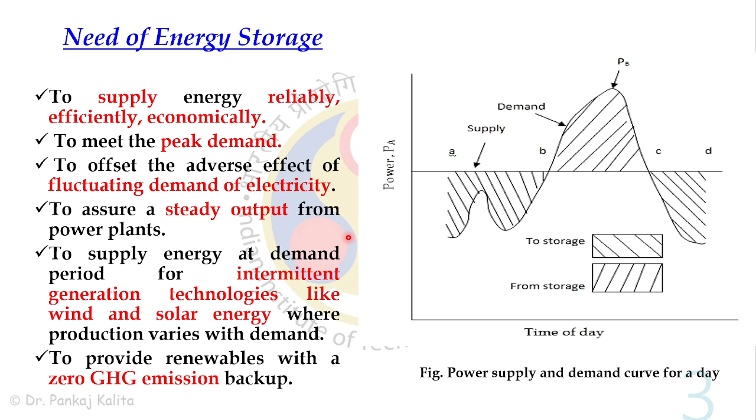To bridge the gap between supply and demand, energy storage systems come into picture. What does an energy storage system do? Basically it stores the surplus amount of energy generated during the day, or say during summer season, and then supplies it when your energy generation is low, say at night time or in winter season. So this energy storage equipment provides a very steady, reliable output to meet our demand. That is the whole idea about the energy storage system.

For that we need an energy storage system - it could be thermal energy, electrochemical energy, pumped hydro, which is very common, compressed air energy storage, energy storage by flywheel which is a mechanical form, magnetic energy storage, chemical energy storage, or hydrogen storage. Depending on the temperature range of your application, how much energy density you want, how much cost you want to go for, and how efficient your system is, we decide which energy storage system to go for.

So here we'll mainly talk about thermal energy storage and thermochemical energy storage.

So have I already explained what is the need, how does it work? Basically, when a surplus amount is there, storage is there, and when there is deficiency, then your supply is there from those storage medium.

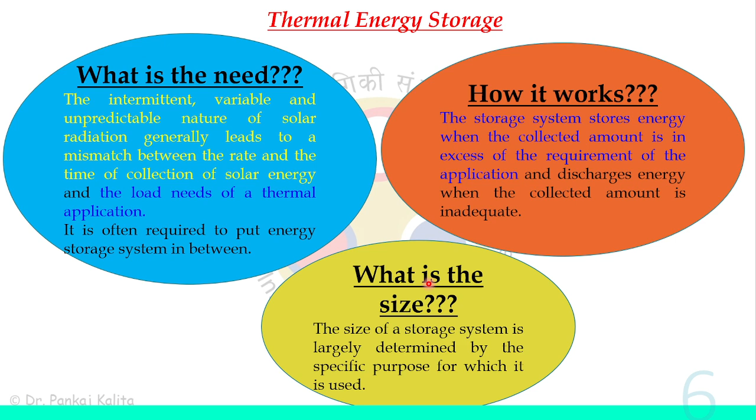What is the size of this thermal energy storage medium? That depends totally upon what purpose you are going for. So, depending on whether your demand and supply is consistently happening, and you have to store it for a very small interval of time, then you need a very small storage, a buffer storage. For a day you have a diurnal system, and for annual storage, you need a very large long term storage system.

So you can see this is for a month also, how during a month your load and demand curve basically varies. During the first few days of January, when sunshine is not very prominent, your energy collection is very low, as compared to the last 15 days of the January month, but the demand is constantly constant throughout this month. So you need to understand what the curve signifies in terms of energy collection or energy production and load requirement.

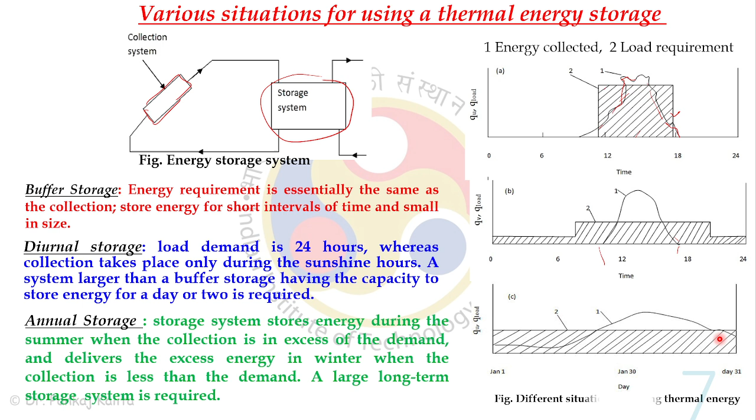So we are talking about sensible, latent, and thermochemical storage. Sensible means basically whatever amount of energy is released for a particular change of temperature. So this equation is well known, equal to mcp delta t, where dt is the change in temperature from T1 to T2. If you want to talk about latent heat storage, then it's where phase change is involved.

So during phase change, your heat is released or heat is absorbed. Basically, thermal energy from the sun could be used to change the phase of a particular substance from solid to liquid, and while it cools off during night time, then that released energy could be used for meeting our load demand. So this is the formula we have already studied, with mass into latent heat of fusion.

If isothermal operation is not there, where there is involvement of both temperature change and phase change, then this formula comes into picture: mcp delta t plus latent heat of fusion, plus from T to T2 temperature. This is for solid and this is for liquid, if there is a phase change also involved.

Now thermochemical storage. This is another interesting storage thing, where basically solar energy is used to drive some endothermic reaction. Endothermic reaction means there is requirement of some energy to drive that particular reaction, so that we get from thermal energy, and we basically get some product. Now that product is stored, and when energy requirement is there, a reverse process happens, where that product is converted back into reactant, and in that process, which is exothermic, heat is released. So that is the whole idea about thermochemical storage.

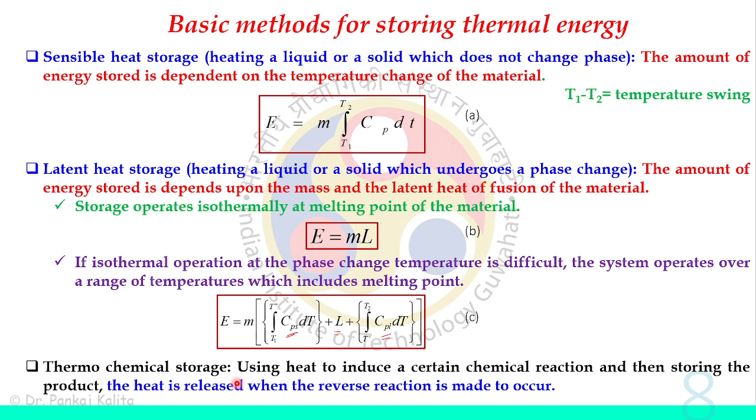So the consideration while designing a solar thermal, or just a thermal energy storage system, is whatever temperature you are going for - what is the operating temperature? In that operating temperature range only, if you are going for latent heat storage, then your phase change should occur. Now, depending on what capacity you are going for, you depend on what temperature again you are going to design your system. There should be a minimum heat loss, and also the cost should be minimal.

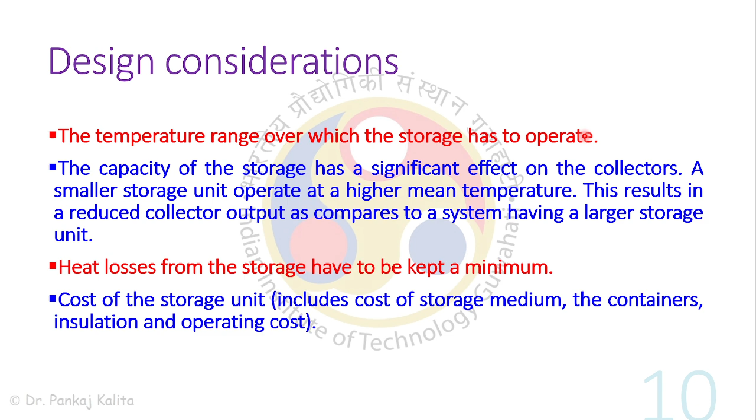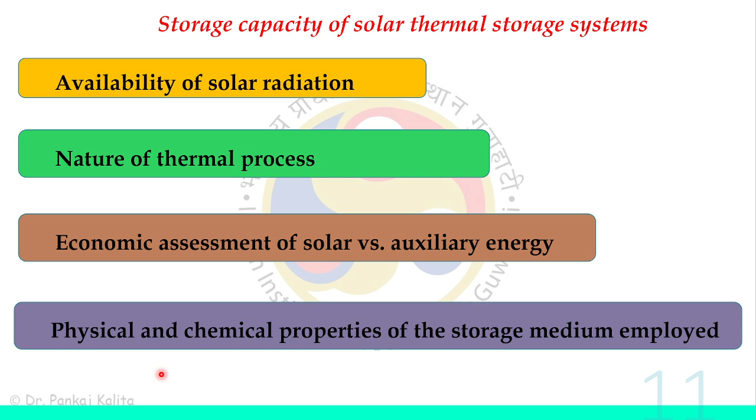So those are important for consideration, and that too depends on system to system, whether you're going for sensible, latent, or a particular thermochemical system. So for solar thermal energy storage system, we also have to see obviously about the availability of solar radiation, and then we have three important points: what the thermal process nature is, what is the economic assessment if you are going for solar or some other energy storage system, and also what is the physical and chemical properties of the storage medium.

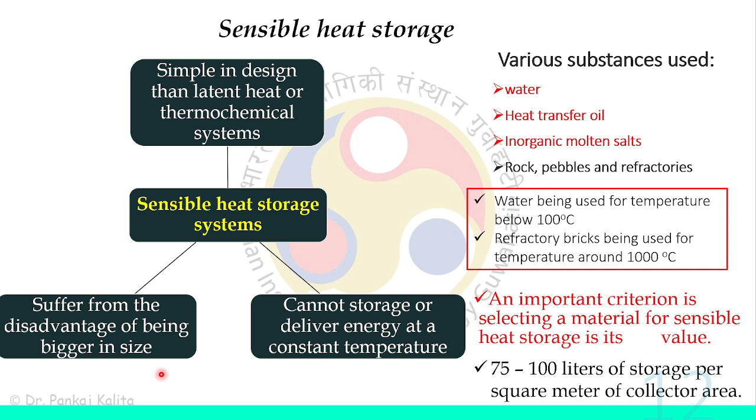I'll not dig deep into this theoretical part. This was just to give you an introduction. What we'll see is...

Okay, let's skip to the numerical part. So this is the question based on...

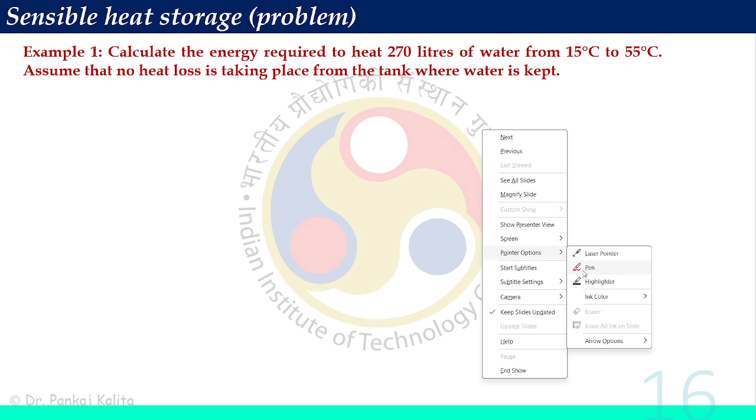Okay, sensible heat storage. We have been asked to calculate the energy required to heat 270 liters of water from 15 degrees Celsius to 55 degrees Celsius. Assume that no heat loss is taking place from the tank where water is kept.

So we have a tank with some water, right? And then its mass is given, and delta T is given, right? What is the temperature change that we need to account for?

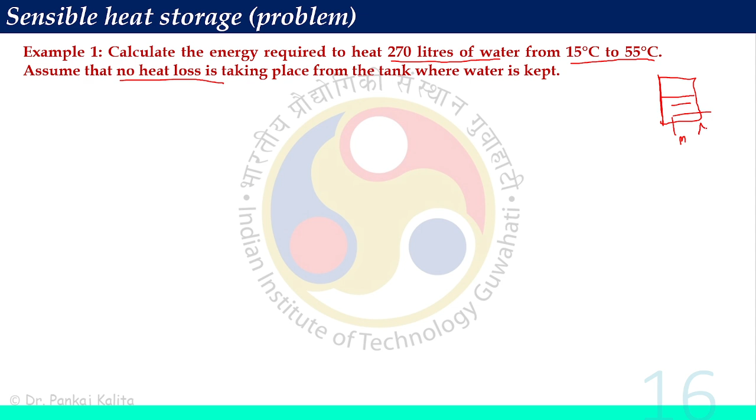So it's a basic sensible heat storage problem, where we already know the density of water, the CP value of the water, and the delta T temperature change is basically 55 minus 15, that will be 40 degrees Celsius. So we can easily calculate the energy required, that will be mcp delta T, right?

So it will be m into specific heat capacity, and delta T is change in temperature. That will be value of Q. Note that m, 270 liters, is given in liters, you need to convert into kg, right? So it will be basically volume into density, and this is your cp value, and this is your delta T. You can calculate the energy required to change this temperature for a particular water filled tank.

Now, if you are using a thermal energy storage, then what will be your saving for electricity? What will be your electricity saving, right? So if price of electricity is 6 rupees per kilowatt hour, then you can multiply it, and you can say that 74.7 rupees has been saved by using this particular energy storage system.

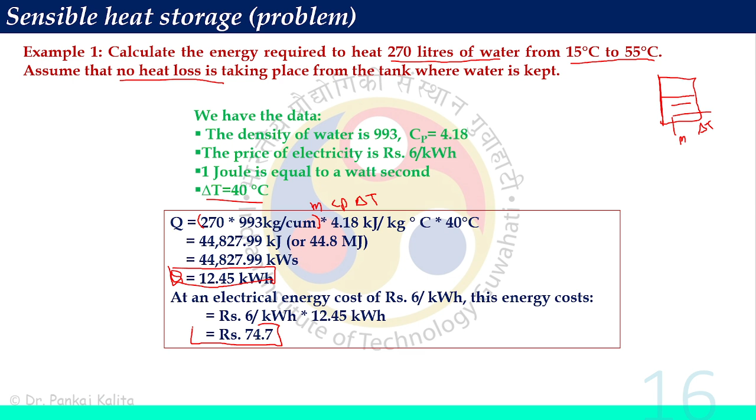Now, this is an important topic. You need to have an understanding of how this particular system has been analyzed. So basically, this is a liquid storage tank in a well mixed situation, and it's basically a sensible heat liquid storage tank.

Whatever heated fluid is coming from your, say, liquid flat plate collector is fed into this energy storage, sensible energy storage system. So this is the energy storage system. And from this energy storage system your load requirement is being fulfilled. So this is where your Q load is being fulfilled.

So for that, this derivation has been done. You can go back and look into the lecture. The important formula that you need to remember is this formula. This is the final result after the analysis, the important formula that we get.

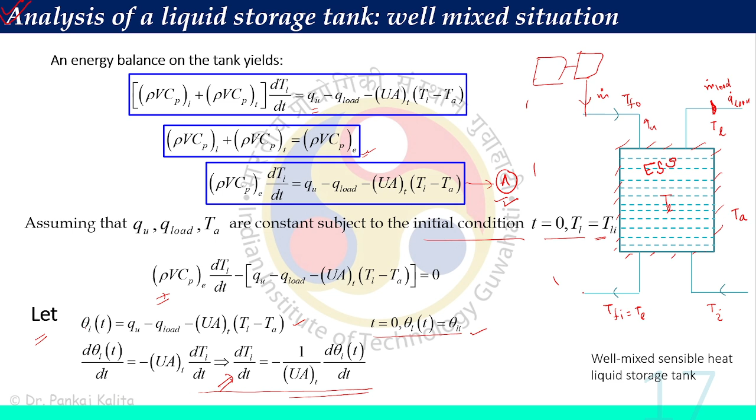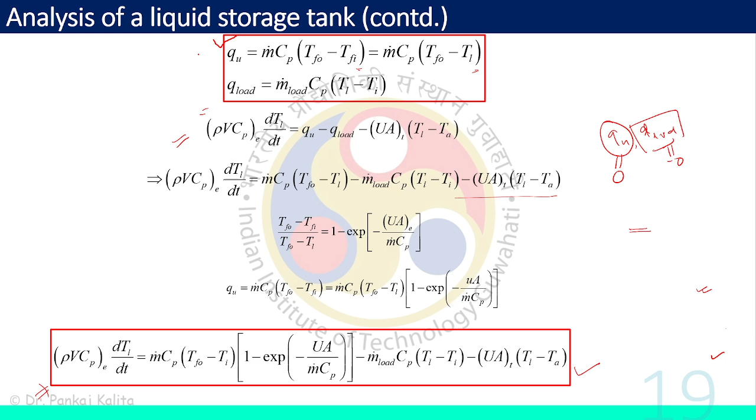And obviously, Q useful is equal to mcp delta T. Well, delta T is for fluid from inlet to outlet. So if you remember, this is delta T of fluid inlet and outlet. And for load requirement, we know that whatever mass flow rate is going towards the load, and then the initial and final temperature of that liquid. So we'll see one numerical, it will clear it out in much detail.

Okay, so this is a problem of a liquid storage tank. A well mixed water storage unit contains 3100 kg of water, and is provided with auxiliary heating of 3 kilowatt. So an auxiliary heater is there, 3 kilowatt. Shows the configuration of the system.

Data for the useful heat gain from the collector, ambient temperature, and rate of withdrawal to the load. So basically this is m dot load. Whatever rate at which your fluid withdrawal is there towards the load on a particular day from 3 to 12 hours are as follows. So for every hour from 3 to 12 o'clock, these three values have been mentioned in the table.

Assume that the auxiliary heater switches on when the temperature in the tank falls below 45 degrees Celsius. So whenever the temperature in this tank falls below 45 degrees Celsius, this auxiliary heater starts to work, and the makeup water enters at 24 degrees Celsius.

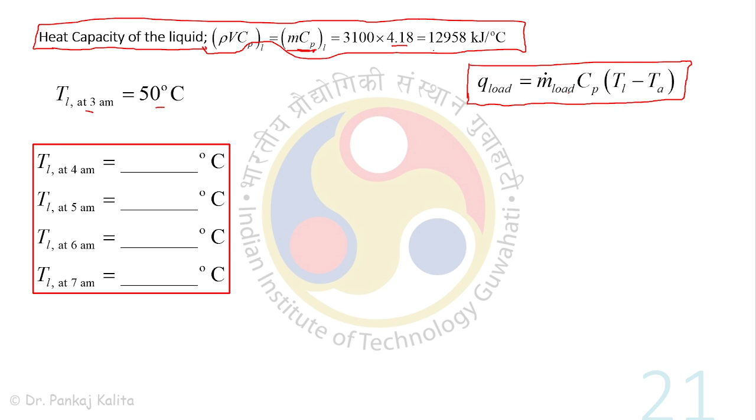We already know the formula for sensible heating. It will be basically mass flow rate going towards the load into specific heat capacity into change of temperature. We already know the ambient temperature also. Note that the ambient temperature is not constant, it also varies throughout the day with every hour. So at 3 a.m., from 3 to 4 a.m., it was 16 degrees Celsius, so that's why we have taken 16 here.

Now the starting temperature at 3 a.m. for liquid in the tank was 50 degrees Celsius. If we calculate this, we can know what the load requirement is from 3 to 4 hours, in kilojoules per hour.

Now this is the formula that you need to remember. Direct questions will be framed on this formula only. So we know Q load.

Now for very early in the morning, your useful heat gain is zero, right? We are not basically getting any heat from your collector, so your QU will be zero.

UA t is already given in the question. We already know T ambient, and we already know the initial temperature for the liquid in the tank. We know rho CP V that we have already calculated here, which was the heat capacity of the liquid, and we know the time.

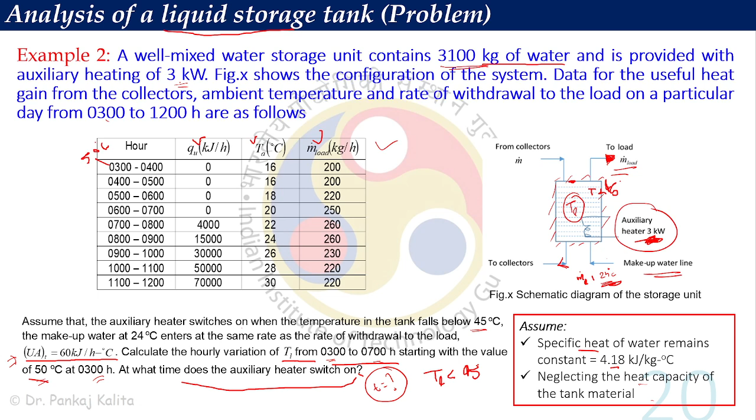If the liquid temperature in the tank falls below 45 degrees Celsius, we can see that at 4 a.m. it was 47.65, and at 5 a.m. it was 45.46 degrees Celsius, the temperature of liquid in the tank. So the time at which the auxiliary heater needs to be switched on lies between this only.

We know that at 5 o'clock the temperature was 45.46. And what is the time required for the temperature to reach from 45.46 to 45? It will be basically between 5 to 6.

So you can see the temperature is decreasing with time. From 45.46 to 43.46, somewhere here your 45 degrees Celsius will be reached. So we are basically trying to calculate the time at which this particular temperature is reached.

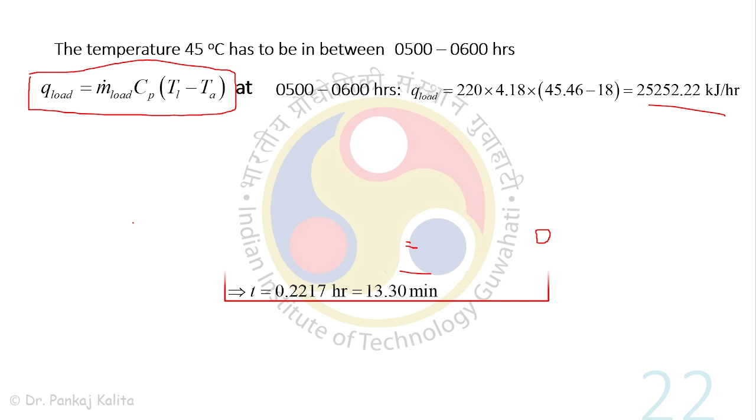So basically we know TL is now 45, TL initial is 45.46, which was at 5 o'clock, and we know all the other values. We can calculate the unknown T here. If we calculate it, the T will come in hours.

Note that T always here will be put into hours only, it's not in minutes. So we can calculate it back in minutes, it will be multiplied by 60.

So it will be 13.30 minutes. So from 5 o'clock, we'll add 13.30 minutes, and that will be basically the time at which your auxiliary heater needs to be switched on.

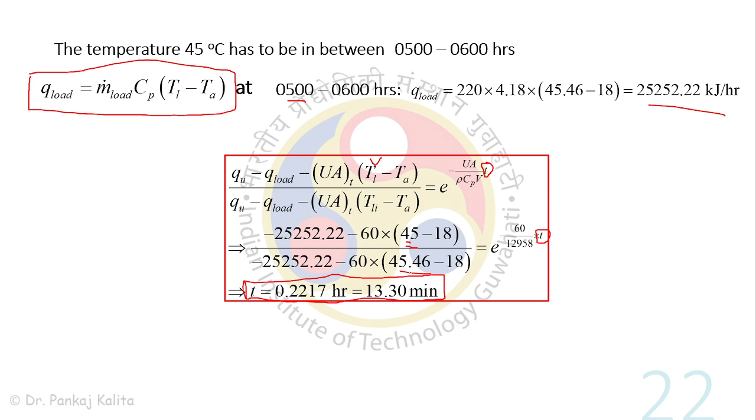So that is the numerical based on your liquid in the tank as a sensible heat storage medium. Hope this question is clear, how to approach this type of question. So mainly you need to remember this formula. This formula is very very important. It tells how the temperature of the liquid varies with respect to time, with your particular required load, and your continuous useful heat gain.

Now stratification is another very important term. Stratification means there is a temperature gradient within the storage tank. In the previous question, we were considering that the temperature of liquid in this storage tank was constant throughout. It was not varying, right?

But in an actual system, there is some stratification in the storage tank. As the water gets heated, the hot water zone is in the upper zone of the storage tank, and the low temperature, heavier water is basically in the lower half, or downside, of the storage tank. That is known as stratification. So this water tank may operate with a significant degree of stratification due to density difference. This allows hot water to be delivered to the load and cold water to return to the collector.

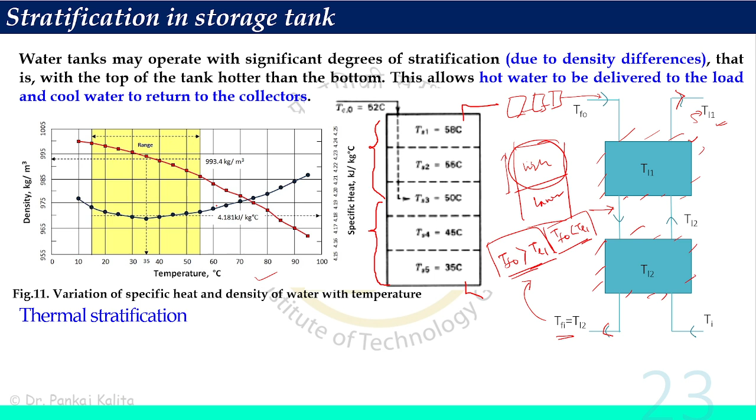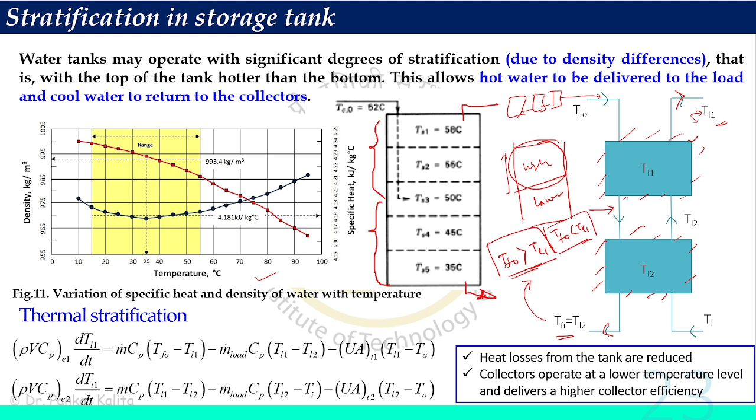So how does it help? It basically reduces the heat loss from the tank, and now the water going to the collector is at a lower temperature. So the collector operates at lower temperature also, and your collector efficiency will increase.

Now a very important heat storage medium is your phase change material. As the name suggests, there is a phase change involved in this thermal storage medium. It could be solid to liquid when heat is absorbed, and liquid to solid when heat is released.

So this curve was for the sensible heat, and this is your latent heat curve. This is where, at constant temperature, your phase change occurs, and then it could involve the sensible heat part where your temperature again rises. So this is your latent heat part. As compared to sensible heat, your latent heat of fusion has a very high value. So in a very small volume change, you can get a very high energy density, very high energy, in case of phase change material.

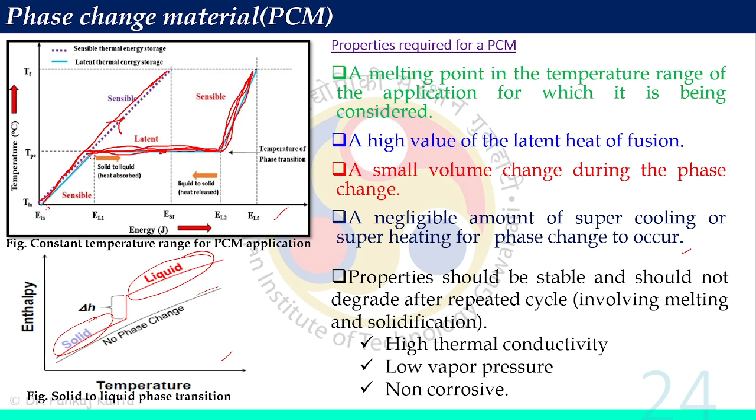Now, the properties that we want in a phase change material are that it should be very stable, it should not degrade with repeated cycles, because it involves many cycles of solidification and liquefaction. And it should have high thermal conductivity. It should not form vapors easily, so it should have low vapor pressure. Even if formed, the pressure should be low, and it should be non-corrosive in nature.

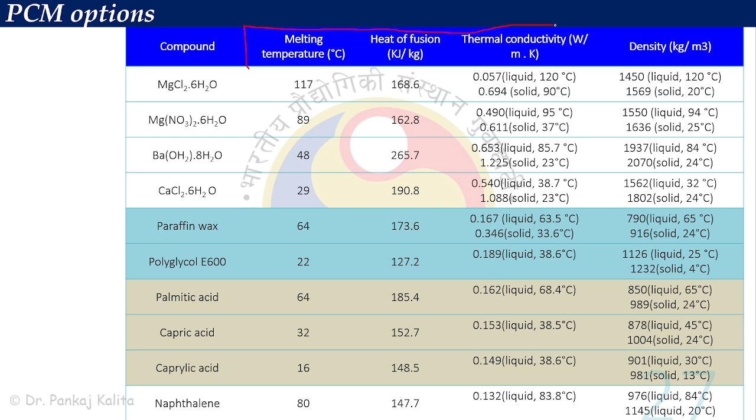These are different PCM options with melting point, heat of fusion, thermal conductivity, and density. Basically, these four are the important parameters we consider while choosing a phase change material. That's why it's listed here, depending on whether it's inorganic, organic, paraffin or non-paraffin wax, or aromatic. So these are all listed here. Let's not go into detail.

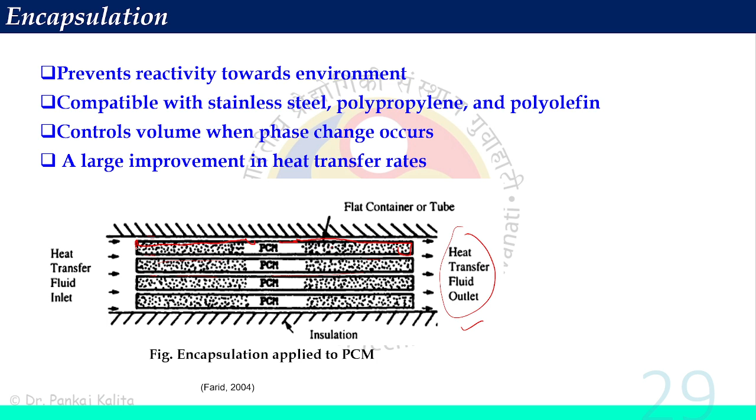The other method to enhance thermal conductivity could be use of fin or filling, or maybe a graphite matrix, or it could be any porous medium. Okay, let's not go into detail.

So the thermochemical storage, I've already explained. To drive an endothermic reaction, energy is required, that is we get from thermal energy, and we store that product. And when your energy requirement or load requirement is there, the reverse reaction occurs, and in that reaction your heat will be released. So this is a typical example.

This is called steam methane reformation, where steam reacts with methane to get your syngas - carbon monoxide plus hydrogen. This is a very famous, very useful reaction, basically a hydrogen production reaction. Most of the hydrogen produced in the world today is basically with this methane reforming, especially this steam methane reforming reaction.

So we can see the temperature of the forward reaction and temperature of the reverse reaction. At this temperature, basically the forward reaction takes place, and when energy will be required, this syngas could react back to give methane and H2O. So this is the energy stored per unit volume of the storage. These are some other reactions.

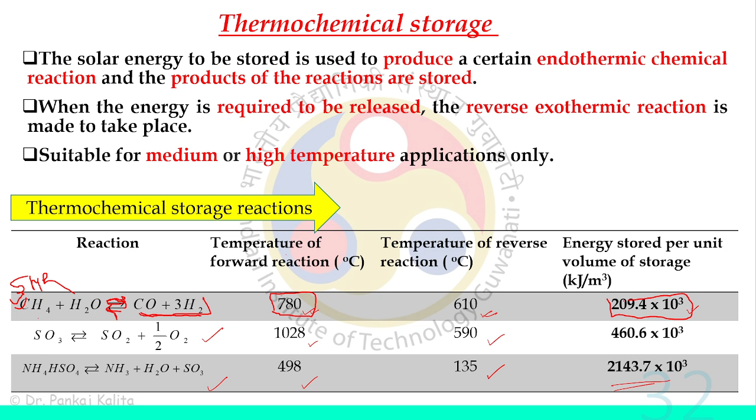I think this was enough for an introduction. The interesting part is this solar pond. So I'll just give you an idea about the solar pond.

It's a very economical, easy way to collect and store solar energy if you want to operate within a temperature of say below 100 degrees Celsius. So from 60 to 100 degrees Celsius, it's a very good system to store basically thermal energy.

So what is a solar pond? It's a saline water pond, basically containing salt, and the concentration of salt in this water varies throughout the depth. There is a concentration gradient between the top of this pond and the bottom of the pond, and due to this naturally formed vertical salinity gradient, low saline fresh water will float on the top, and high saline water, due to high density, will be settling down at the bottom.

And as the layer of salt solution increases, the concentration with depth also increases. At the base, at a very high depth, this has a very high uniform salt concentration.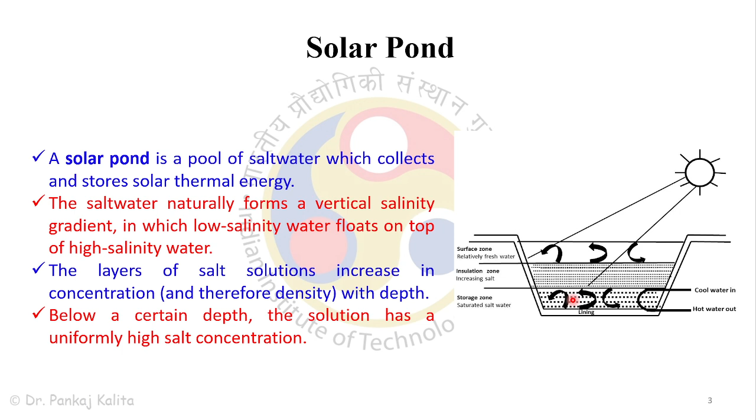So this is the history of the solar pond. First it was invented in Israel for a maximum temperature of 100 degrees Celsius, and in India also we have such a pond in Gujarat. So this is the important thing.

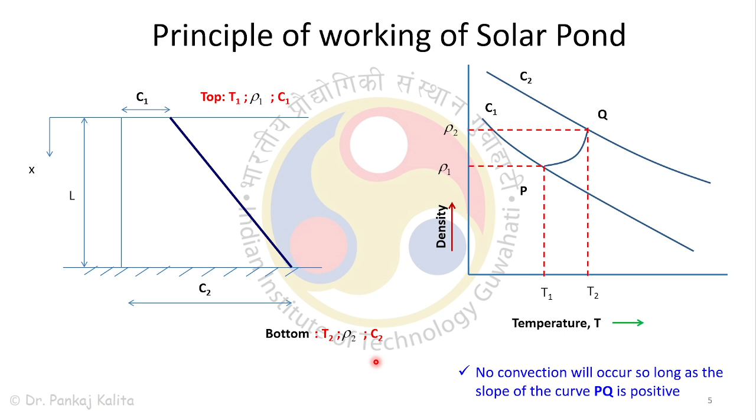So as the depth increases, this concentration gradient increases. This is at top and this is at bottom. So density and concentration at the top is different than the density and concentration at the bottom, and the temperature also varies, right?

So what you need to remember is basically density is a function of concentration and temperature. From that we get a stability criteria. So this is the stability criteria that you need to remember.

So this is how concentration varies with the depth. It depends on your density varying with temperature at a constant concentration, and your temperature varying with depth, and your density varying with concentration at constant temperature. So this criteria you need to remember - this is the stability criteria of a solar pond with a concentration gradient.

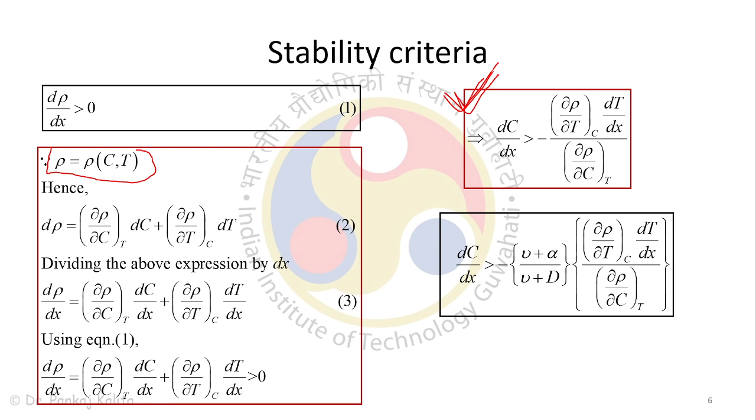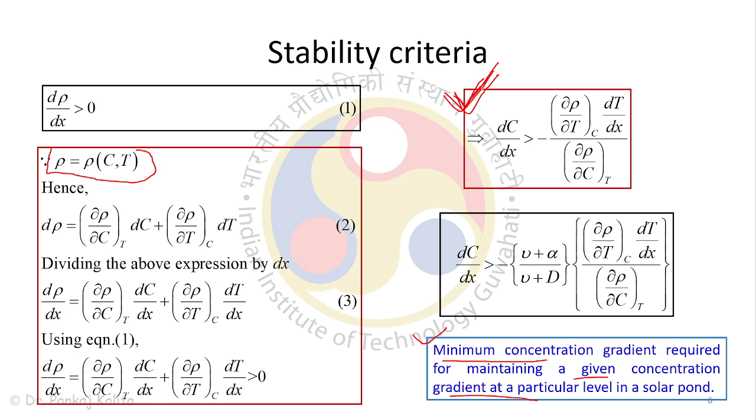So this is the minimum concentration gradient required for maintaining a given concentration gradient at a particular level in a solar pond. So if in a question it states that at this depth, what should be the minimum concentration gradient to maintain this level of concentration, you automatically fall back to this stability criteria, and we'll apply this and see some numericals based on this stability criteria very soon.

Okay, this is the question. Say sodium chloride is used as a salt in a solar pond. Estimate the minimum concentration, in kg of salt per kg of water, required at the bottom of the pond if the concentration at the top is 0.02 and a temperature difference of 65 degrees is to be maintained. So that is the temperature difference that we want out of this solar pond. Assume that the concentration and temperature profiles are straight lines, and take the average values of change in density with temperature and change in density with concentration to be the particular values given respectively.

Okay, so we know that this is your solar pond. Say this is your top and this is your bottom, right? Sodium chloride is used. What's given is: if the concentration at the top is given, say 0.02 per kg. And the temperature difference, from top to bottom, delta T is 65 degrees Celsius.

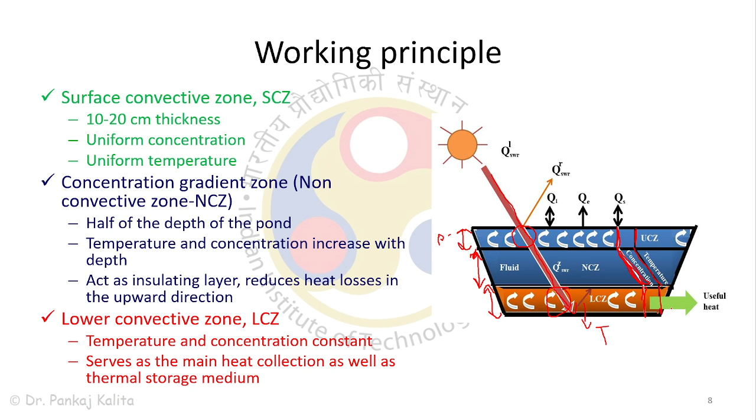The variation in concentration and temperature actually occur in this non-convective zone. Okay, so this is the concentration gradient zone. And then at depth also, the concentration is very high, like saturation concentration, and this concentration is constant at the bottom layer. Okay, so this is the layer with actual basically high temperature zone, from where your useful heat is basically extracted.

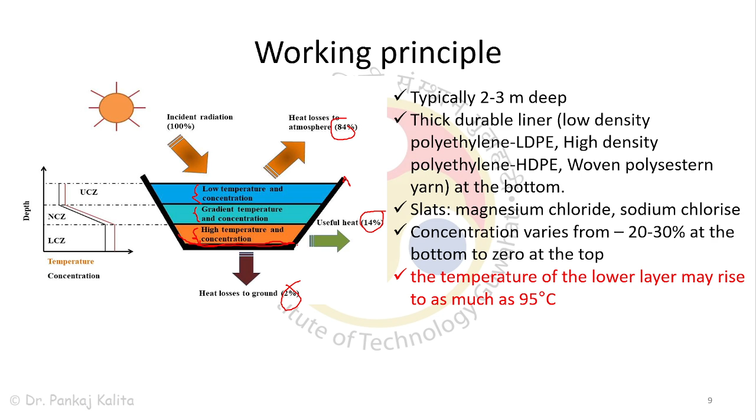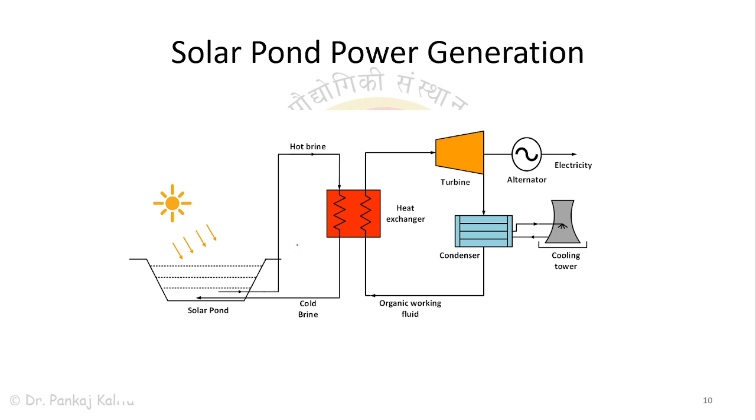Now the solar pond has been explained in very detail about how to do its energy balance, how to calculate how much has been transmitted in the pond, how much has been lost to the surrounding, how much has actually reached the bottom of the pond, and what is the useful heat gain. This solar pond has been explained in very detail, so I will not go in detail for this particular topic. You can already go back to the lecture and watch this. What I will do is I will highlight the important formula again.

That is where your Snell's law comes into the picture. We have already studied this earlier. So sine theta 1 upon sine theta 2 is equal to n2 upon n1, which is the ratio of the refractive index of medium 1 and medium 2.

We have already seen how to calculate the two components of reflectivity, rho 1 and rho 2, and the actual reflectivity is the average of these two values. Then you can calculate the transmittivity, or you can directly calculate transmittivity by doing 1 minus this rho value.

then most of it basically goes inside the pond, so the loss due to reflection is only about 2 to 6%. If this angle is greater, then most of it is lost to the surrounding, so most of it gets reflected back to the surrounding.

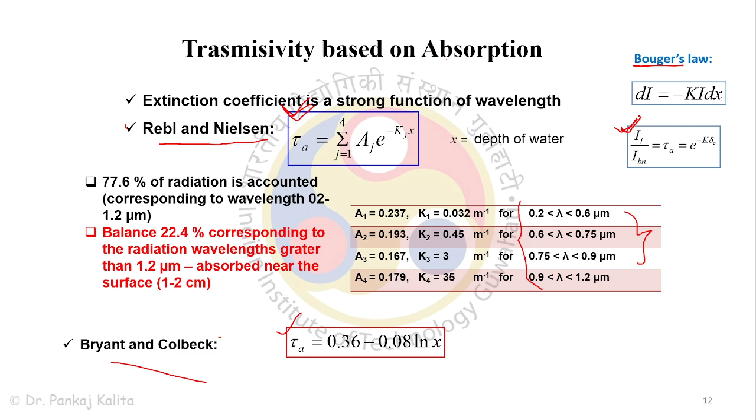Now, this is another correlation given by Bryant and Colbeck, where X is the depth of the water, and tau is the transmittivity based on absorption. But Rabl and Nielsen's is the widely used formula for calculating transmittivity based on absorption.

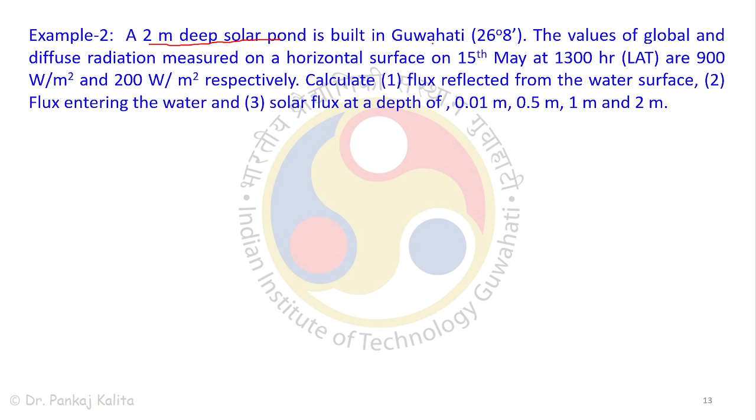Now, this numerical explains well whatever we have studied. So a 2-meter deep solar pond is built in Guwahati. The value of global and diffuse radiation measured on a horizontal surface on 15th May at 13 hours are 900 and 200 watt per meter square. Calculate the flux reflected from the water surface, the flux entering the water, and the solar flux at depths of 0.01, 0.5, 1, and 2 meters.

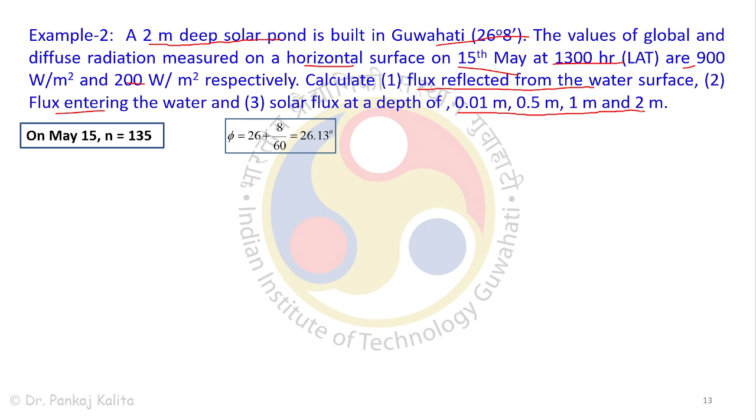So we already know the basic drill. We know the date, we can calculate n, we can calculate the declination angle, right? 23.45 sine of 360 by 365 times 284 plus n. We know the phi value, we know the delta value, we know the omega value also.

So it's given as 13 hours. So for 13 hours, omega will be 15 degrees. It will be 15 degrees, and since it's basically afternoon, the sign will be negative. So we know omega, we know delta, we know phi.

We can calculate the incident angle or cos theta 1, right? We know the formula: cosine of the incident angle is basically sin phi sin delta plus cos phi cos delta into cos omega. This is for a horizontal surface, okay?

We can calculate theta. If we know theta, we can calculate theta 2 by the Snell's law we just studied. This is your Snell's law, okay? We know the refractive index for water and air; this is basically 1.33, and we can calculate theta 2.

Now, we know theta 1 and theta 2. Theta 1 is basically 15, and theta 2 value is basically 11.715. So this is similar to this part, right? At that value, your rho b is 0.02. From the table, we can directly get this, so the rho b value will be around this only, right?

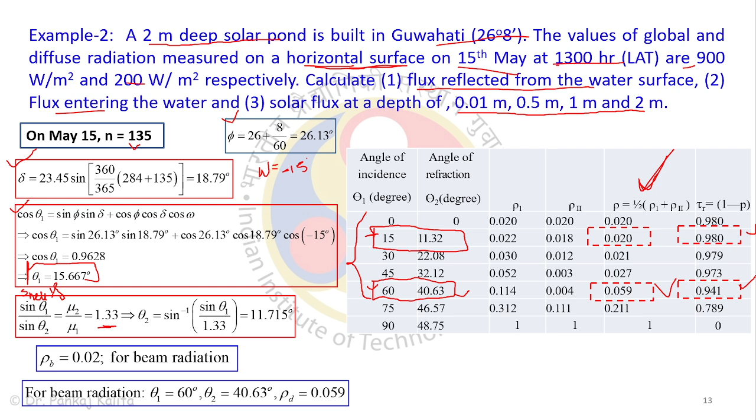Now the flux reflected from the water surface. So if this is your solar pond, this is the radiation coming — this is beam radiation, and some diffuse radiation will be also coming here, right?

So we have already given the global value, which was 900, and the diffused value, which was basically 200. So we can calculate the beam part or direct part, which will be 900 minus 200, which will be your 700, right? And you already calculated the reflectivity for beam radiation and reflectivity for diffused radiation.

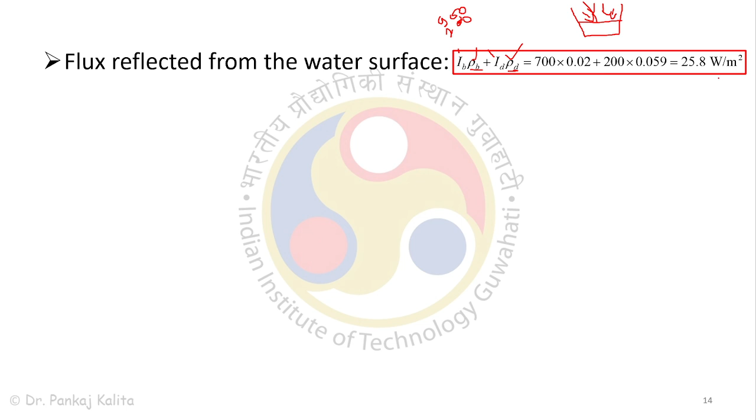After 60 degrees, your diffused radiation comes into picture, that's why this value, 0.059, has been taken. So we can calculate how much of incoming beam radiation and diffused radiation has been reflected from the top of the water surface. So 25.8 watt per meter square has already been reflected from top of the surface. Now the rest will be entering the water. So the flux entering the water will be 900 minus this 25.8 watt per meter square. This much is actually entering into the water, right?

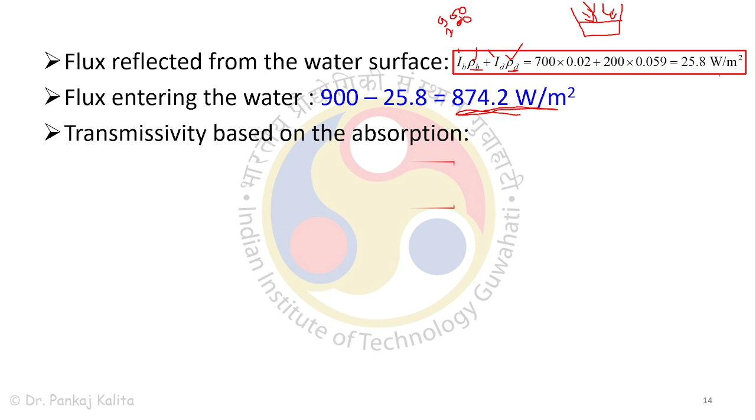If you want to calculate the flux reaching at different depths, then we need to calculate the transmittivity based on absorption, right? So we already know this formula for x depth and theta 2 refraction angle. This tau is the value transmitted based on absorbability. This is the formula we basically use to calculate this value. So we know the x value, x is the depth. So the values mentioned in the question, we can calculate x based on theta 2. This was for beam and this was for diffused, right? So we can calculate this tau a value.

Knowing this tau a value, we can calculate solar flux at various depths. We already know this is your beam part and this is your diffuse part. So we can calculate individually the beam radiation that has reached a particular depth, and this is the diffuse radiation that has reached that particular depth. We already know the value, we can calculate the solar flux at different values.

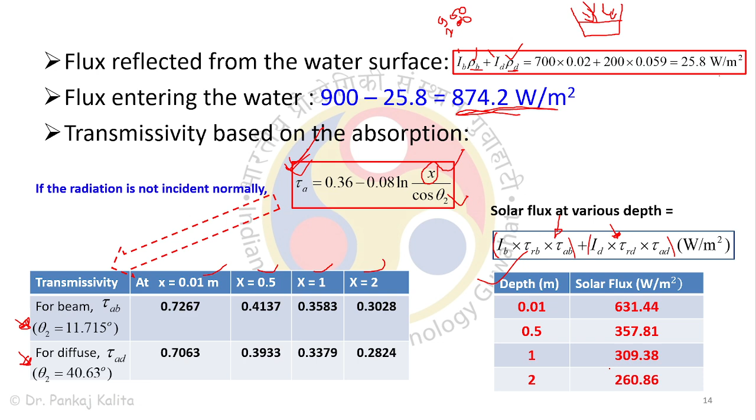See how, with increasing depth, this solar flux value decreases. So out of 900 watt per meter square, only 874.2, basically, goes below the water surface and actually reaches in your pond. And this value, with depth, how it decreases - we can see with depth how it decreases from 874.2 watt to some value around 200.

The surface convection zone, which is around 10 centimeters, where most of the radiation is dropped, is between 1 to 2 micrometer wavelength, and about 30% of the incident energy is absorbed in this particular surface convection zone. This energy is almost entirely lost to the surroundings because of low collection efficiency, obviously, and the flux penetrating to the bottom is actually this 261 watt, which is about 31% of the incident energy.

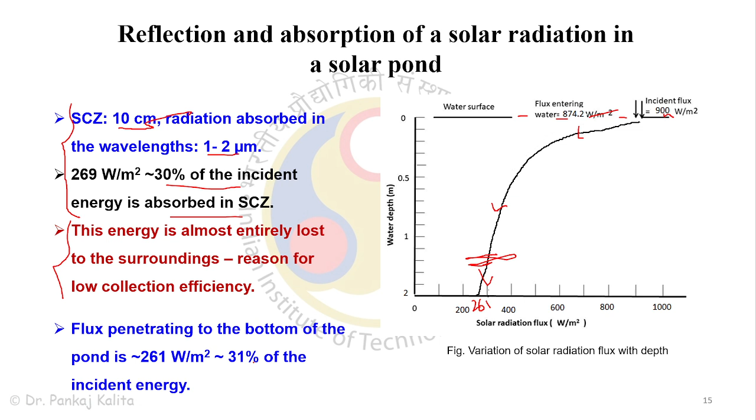So you can see how only a small part of whatever incident flux is there on the solar pond actually reaches the bottom of the surface. That's why the collection efficiency of such systems, the energy storage systems, is very low, even lower than your flat plate collectors.

So this is temperature - how to calculate temperature distribution and collection efficiency. I'll not go into detail, it's all basically energy balance only. So let's skip this.

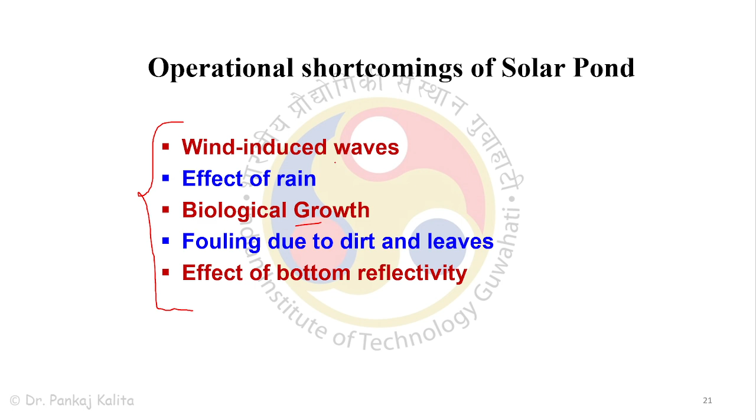So these are some practical shortcomings of solar pond, where biological growth, dirt, leaf, and effect of rain and wind-induced waves are some shortcomings to this solar pond, including its low efficiency, right?

So solar gel is another alternative where we include a layer of polymer gel trapped in a Tedlar plastic bag in between your surface convection zone and your bottom lower convection zone, and basically it reduces the evaporation loss from the surface, and the efficiency somewhat increases as compared to your natural convection solar pond.

Okay, so let's directly go back to this numerical.

So this is a very important relation, an analytical solution for the annual temperature variation - how the temperature within the solar pond varies annually. This is given by Rabl and Nielsen. If you remember this particular formula, this was for the transmittivity, right? So what does this formula signify? Let's see the terms first.

This third zone is for the lower zone. This is annual average temperature in the lower convective zone. This is the annual average ambient temperature. This is your transmittivity, right? This is your annual average global radiation, thermal conductivity, and this term you already know, where L2 is the depth of the water, and Q load is your annual average heat extraction rate and area of the pond. So we can calculate, for a particular application, for a given load requirement at a particular location with particular insolation, what will be the area of the pond. Okay, so that is the basic idea about this formula.

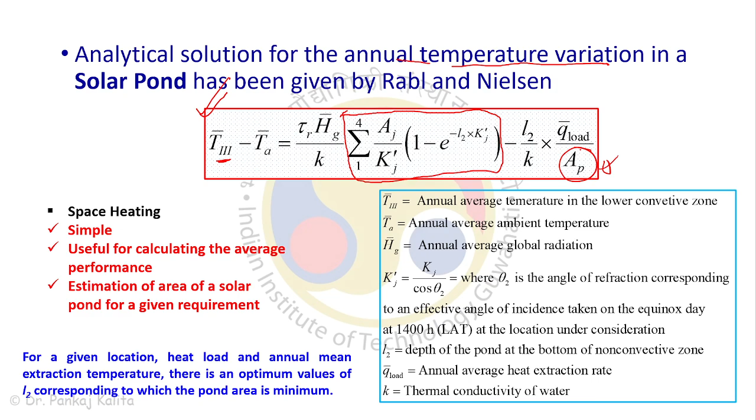So let's see with an example. A solar pond located at a place is to be used for supplying heat energy input for a low temperature Rankine cycle, using ammonia as the working fluid. The unit develops output of 18 kilowatt. So the output of this low temperature Rankine cycle is actually 18 kilowatt, and energy conversion efficiency is 8%. Now it requires its energy input at annual mean temperature of 82 degrees Celsius. Use the Rabl and Nielsen analysis to calculate the pond area for values of depth L2 varying from 1 to 3 meter.

So that the area is minimum for a particular value of L2. Plot the variation of area versus depth, and the radiation and ambient temperature. The annual average daily global radiation is given, and the annual average ambient temperature is given.

So basically this is Hg bar, right? And this is your Ta bar. Depth, your L2, is varying from 1 to 3 meter. Your phi is given, and your conversion efficiency is given.

So let's see, this is say your solar pond. The hot water from the solar pond is actually fed into this, basically used for heat transfer in this Rankine cycle, where its output from the turbine will be 18 kilowatt, and the efficiency of this cycle is 8%.

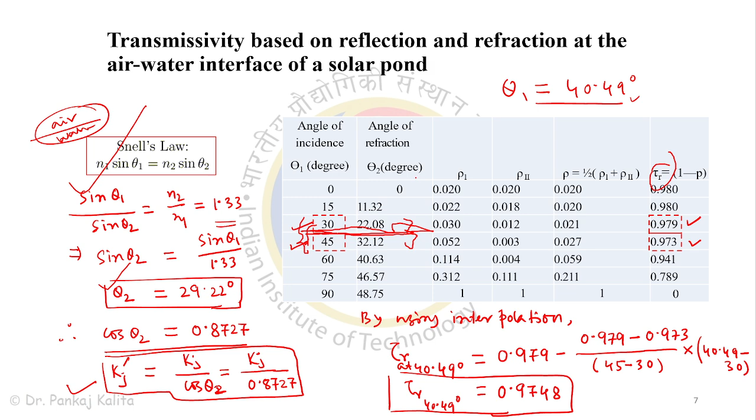So we can calculate tau, right, using interpolation for particular theta 1 and theta 2, depending on any value. For say theta 1 or theta 2 we can calculate tau r. Now we can put all the values into the equation.

So we know that temperature, so in question it has been mentioned that your energy input at an annual mean temperature of 82 degrees Celsius is required. So you know, this value 82, you know the annual ambient temperature, you know the tau r value. You have just calculated this; the Hg bar value is already given in the question. The thermal conductivity for water is 0.648 watt per meter per Kelvin.

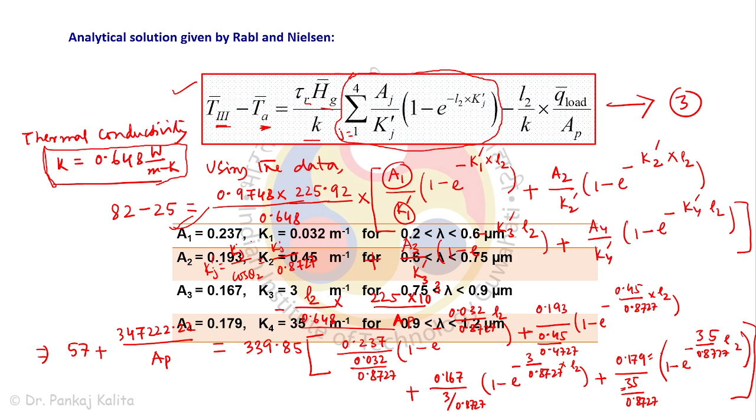Now for this term we need the tables for different wavelengths, A1, A2 and A4 value. You will see this value, and corresponding to particular wavelength, the A1 and A and K value could be put into the equation, and we know K1 dash is your K by cos theta 2. So we can put all this value into the equation and we can finally get your area of pond value.

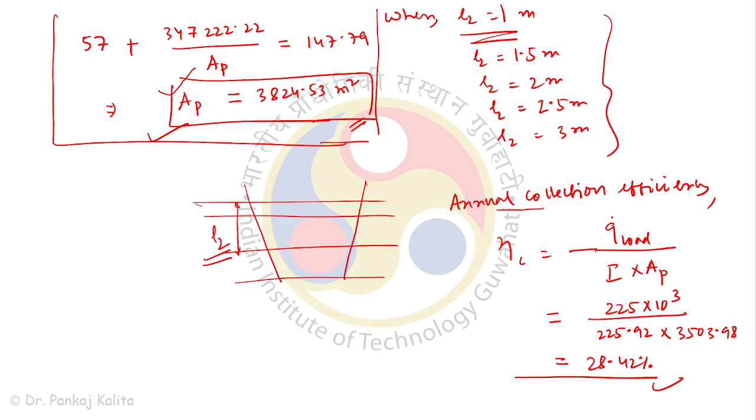And basically this was for 1 meter. Similarly we can calculate it for 1.5, 2, 2.5 and 3 meter, and we can also calculate its annual collection efficiency. So this is how we basically calculate the area required for different depths, and we can see how it actually varies. Now let's see some questions.

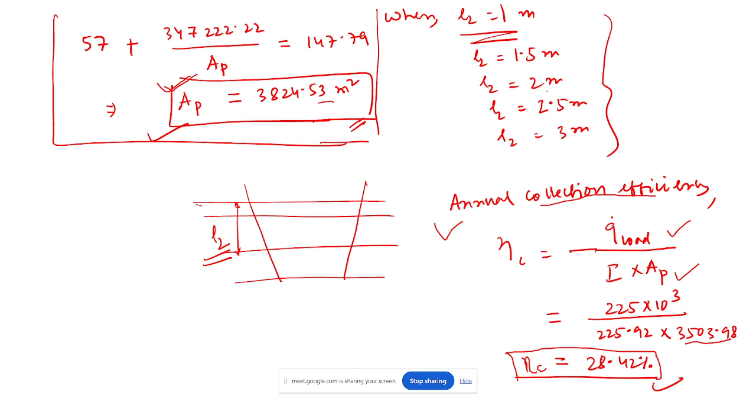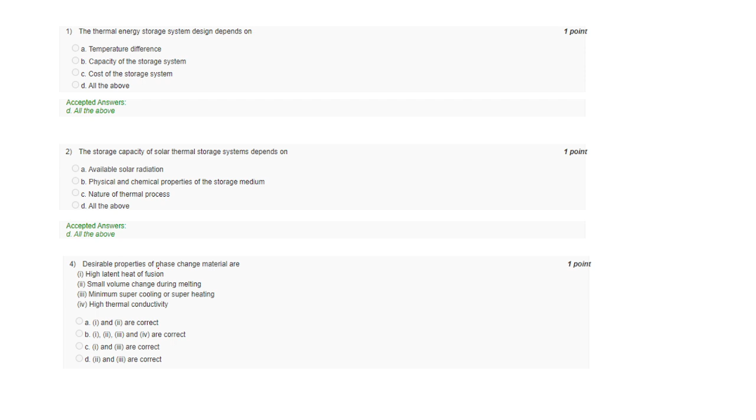Alright, let's see this question also. We have been asked about what is the desirable property of a phase change material, PCM material. So, obviously, it should have a high latent heat of fusion. Higher this value will be, more will be the energy released while it changes phase. There should be small volume change during melting, obviously, so a more compact system could be designed. It should have minimum supercooling and superheating, and also it should have a high thermal conductivity. So these are all basically the desirable properties of a phase change material. So option B will be correct.

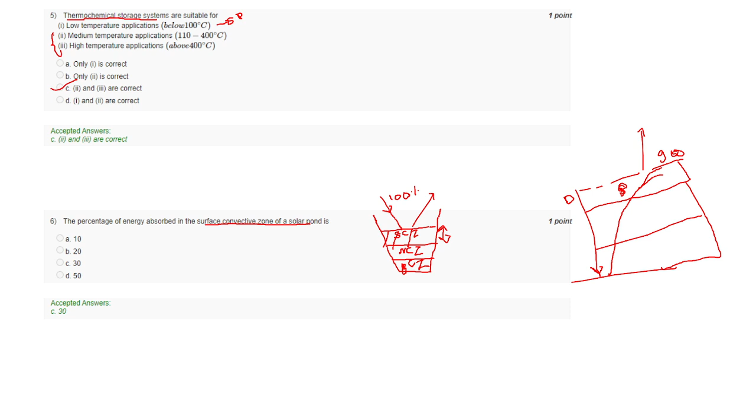Okay, so if you might have paid attention to the lecture slides where different amounts have been mentioned, how much is incoming, how much is lost - we have also solved one numerical, where around 28.5% is lost to the surrounding. If you remember this curve, this is the depth, and how much energy basically has finally reached to the bottom. So out of say 900 was the value, only about 30% was lost to the surrounding at the surface only. Let me draw it - so this is the different zone. About 30% of the incoming energy is absorbed in this basically surface convection, your uppermost convection zone.

Now this is another question. In a non-convective solar pond, the maximum temperature is obtainable at which position?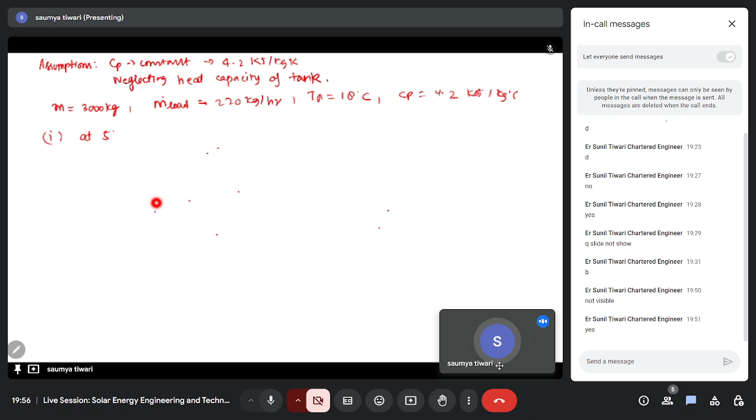Now the first question was, at 5 o'clock the temperature in the tank was 46 degrees Celsius. What is the temperature at 6 o'clock, after 1 hour? That was our question. So first we'll calculate the heat capacity.

So the heat capacity of water, we know, is basically m times Cp of the liquid. So it will be 3000 into Cp, which is 4.2. If we multiply it, it will be 12,600 kilojoule per Kelvin.

Now if we want to calculate the heat to the load, the rate of heat transfer to the load, it will be m into cp into delta T, this is the liquid temperature in the tank minus the ambient temperature. So if we'll calculate it, it will be 220 kg per hour.

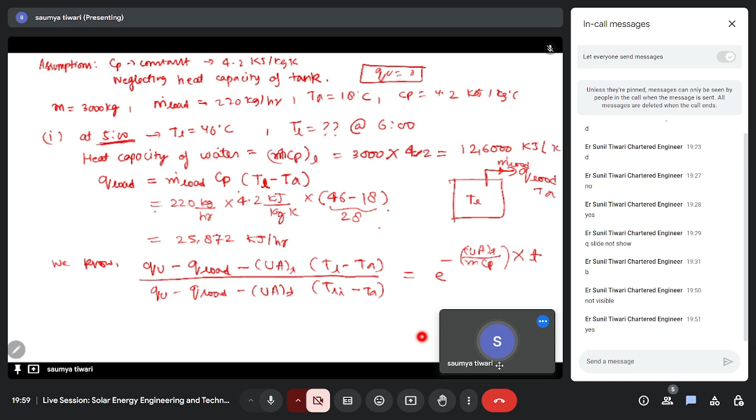We know the value of Q load, that is at 5 o'clock. Now we know the time we have to calculate after 1 hour. So we know the initial liquid temperature, we need to find this temperature. We'll put all the values.

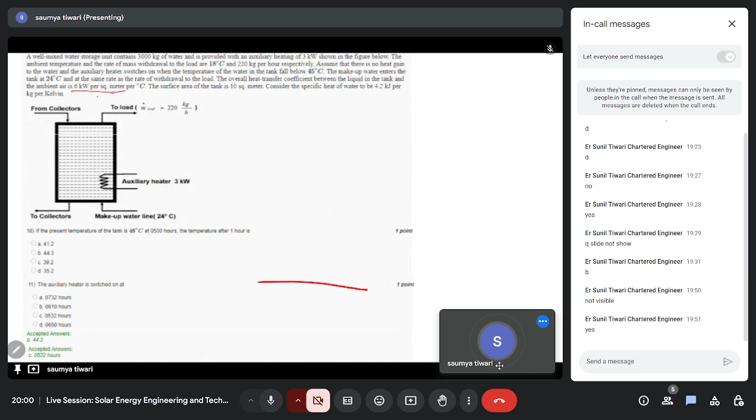So this will be 0, this will be 0, and your Q load is basically 25872 minus UA delta T. The value was 6 kilowatt per meter square per degree Celsius, note the unit, it's only U, the overall heat loss coefficient, and your area of tank is given as 10 meter square.

So this will be 6 into the area of the tank, which is 10, into TL the unknown value, ambient is 18. This will be 0 minus 25872 minus 6 into 10 into the initial temperature, 46 degrees Celsius at 5 o'clock, minus 18, equal to e to power minus 6 into 10 upon heat capacity 12600, and we are calculating after 1 hour.

So when we'll solve this, your TL at 6 o'clock will come to be 44.3 degrees Celsius.

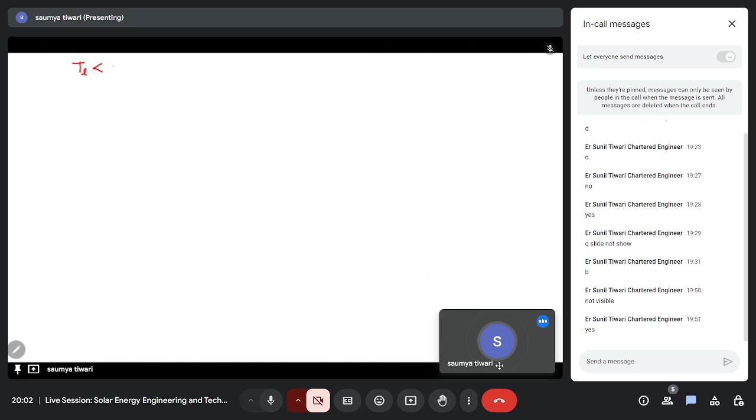Now the next part was to calculate the time at which the auxiliary heater needs to be switched on. We already know the formula. The condition is that if the temperature of the water in the tank drops below 45 degrees Celsius, then the auxiliary heater needs to be switched on. That is our condition, so let me write this formula again.

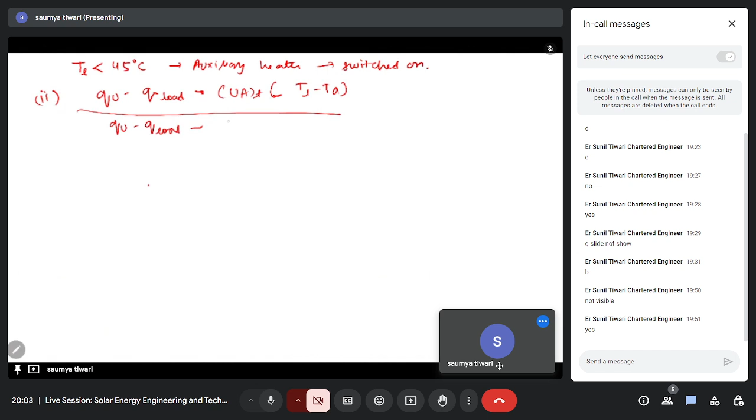So we have been asked what is the time for switching on this auxiliary heater, the condition being when TL reaches 45 degrees Celsius. At 5 o'clock, the temperature was 46.

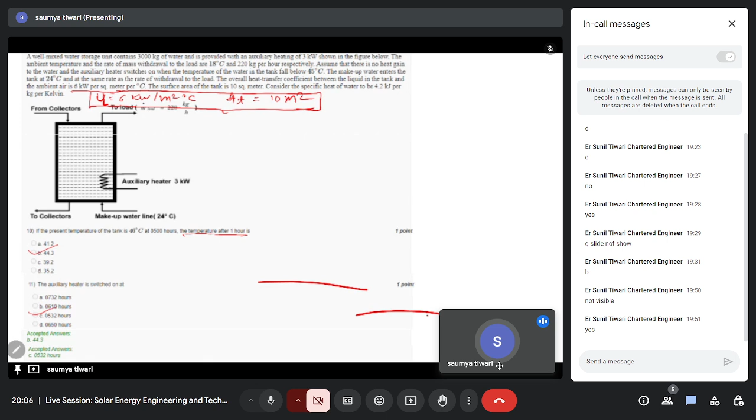So this is how a question is solved for a well-mixed water storage system. In your assignment, I think all of the questions are on theory only, but these are some numerical problems, and the numerical problems are well explained in the lecture also, so pay close attention to those numericals, as the question might be framed on that also.